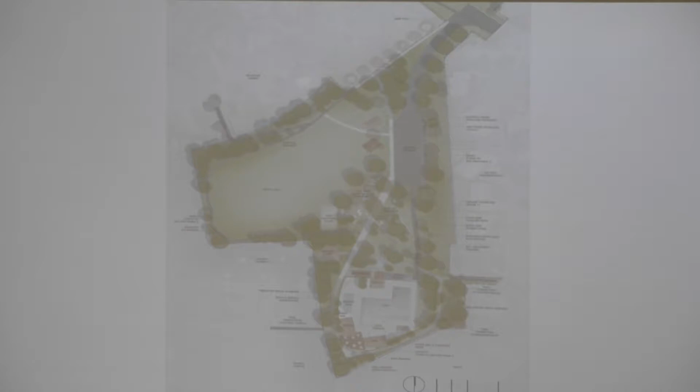Public Works is here so they can speak to how the boiler system and everything works. Key to its existing infrastructure is a solar thermal array on the back that preheats the pool water and helps eliminate heating requirements for the boiler. The idea of the project is to look into the future and develop a plan for how we can make the pool more energy efficient. There's a lot of information in the RFP, including prior work done by CORE, and a subcommittee we had with CORE and Holy Cross discussing variable energy pumps and installing those. That's what we want the RFP to look at.

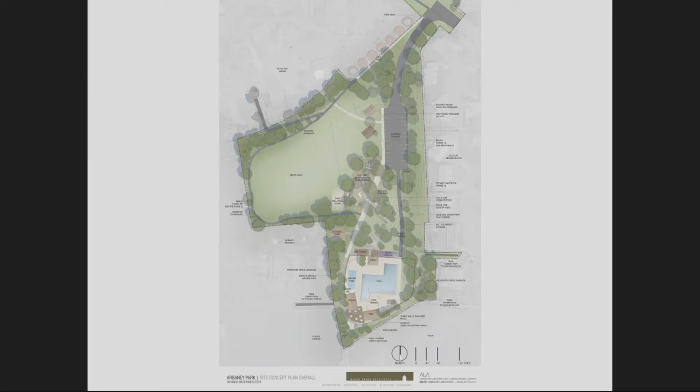The grand plan is that in phase one we do the phase one improvements, but conceptually plan for phase two improvements. This orange area shows what will be built in phase one. In phase two, the restrooms that are currently floating out here would get demolished and moved to the backside. So we conceptually want to include the restroom plans for Arbaney Park in phase one and figure out all of the plumbing needs.

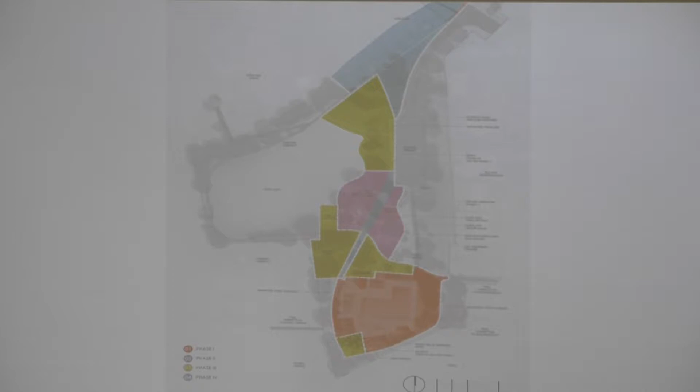There are subsequent phases of the park that I can go into in more detail when we talk about the capital improvement plan, but eventually, not included in this particular scope, we'll be redoing the playgrounds. We have ideas for another pavilion and additional volleyball courts, and that kind of thing will happen in subsequent phases. Anything else you think I should add from this piece, Chris?

So the tasks outlined in the RFP are to develop 2 conceptual options and cost estimates for the kiddie pool. We need full mechanical, electrical, plumbing for the outdated pool pumps and mechanical equipment, and then changing room improvements. There are modest improvements to the changing rooms that I summarized before.

Conceptual design for the future Arbaney Park restrooms. And just to clarify, the Arbaney Park restrooms are for the park, and access to those restrooms is from the park side. They're not in the gated, fenced area.

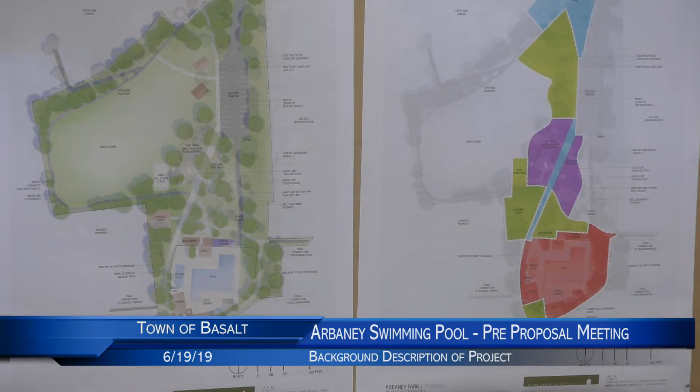One of the ideas from Post is they thought there was a lot of visual barriers when you drive into the parking lot. What you see now is kind of the back end of the solar thermal array where we have some tarps and store the pool covers that we're not using. So they want to really open up this particular area.

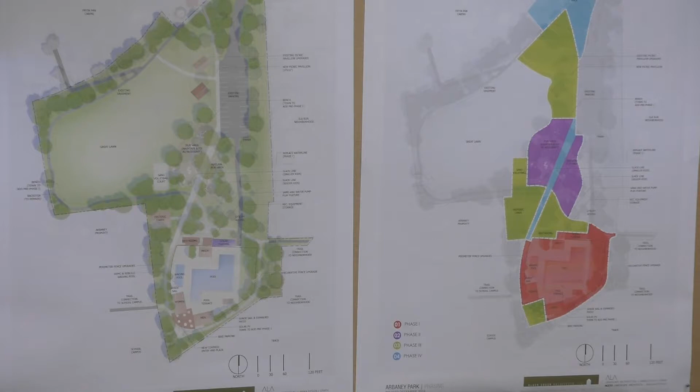We want to develop costs for the selection of design and budgeting. In other words, we want 2 conceptual designs for the kiddie pool. Our thought was that they might be totally different, and that we'd have cost estimates that might range in price. You'd take the design to a level sufficient for doing cost estimates, but you wouldn't actually do bid documents or construction documents on both of them.

And then once the selected design is chosen by the town, you would prepare the bid documents so that we can go out to bid.

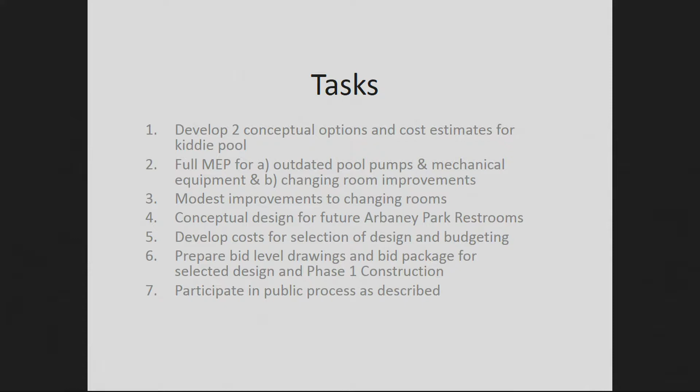And number 7 is participate in the public process as described. Here's the public process. It's not a really deep public process. Post feels that we've gotten a lot of direction when we prepared the original Post Parks, Open Space and Trails Master Plan. They've met with the town council and received direction from the town.

One of those items was really on whether to have a hot water pool or expand the seasons for the pool. The direction from the town council was that the basic framework and makeup of Arbaney Park pool will remain the same. It's to be a community park pool. It's going to be used for 3 months out of the year and will not become a full season pool, and it'll be run lifeguard-wise with the existing business model, which relies on high school and college age kids.

So for the public process, we're not really going out to the public and saying what we want. We have kind of a budget that we're working under. We're not intending to go out for a bond.

So it's pretty simple: a kickoff meeting with staff, a charrette with Post and town councilors, meet with staff, Post, committee, P&Z, and town council as requested. I have an asterisk there because we were envisioning those would be included in the RFP as a cost, so if we ask you to come to more meetings, there would be a cost for each meeting. One public open house where the two options are presented.

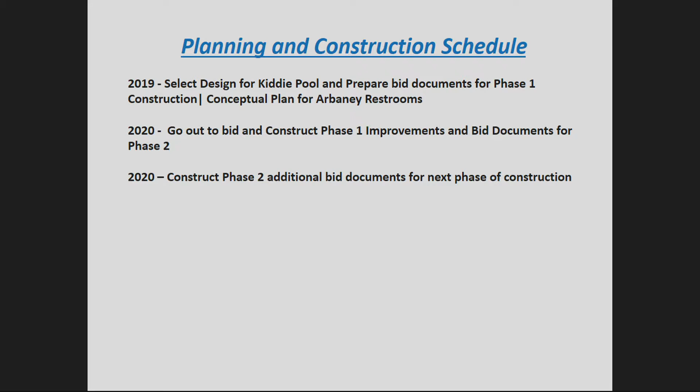Funding for Arbaney Park, I just want to outline for you the money that we're intending to spend on Arbaney Park. In 2019, we currently have $50,000 budgeted, and if you saw the capital improvement plan, it was included in your proposal. So there are places we can take additional funding if we need additional funds this year, and I'll speak a little bit more to that in a bit.

In 2020, we have $475,000, so we're hoping to build the phase 1 improvements for that amount. Keep in mind, we've never prepared cost estimates, so this is looking at our overall whole list of things that we want to accomplish in our parks, open space, and trails, and kind of allocating what seemed reasonable. In 2021, $350,000, and then we have significant funds again in 2022 and 2023 with $600,000 each.

In the proposal, there's a table that we want firms making the proposal to actually fill out. We've found that when we have an outline of what we want people to fill out, we can more easily compare prices across the line. So there's a location to put the price for the design and engineering and the price for each additional meeting, so we can compare apples to apples. Here's your price for the open house and a price for the charrette, et cetera.

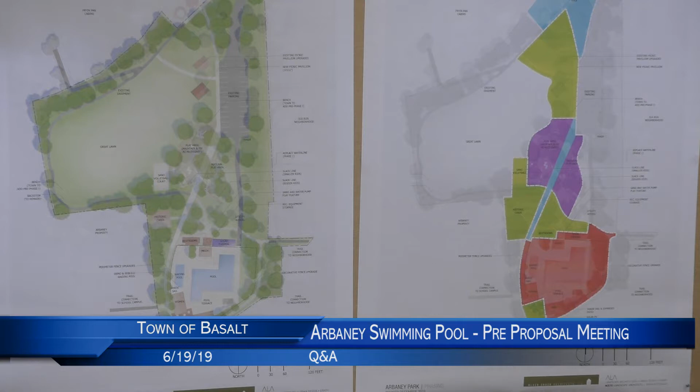I should have clarified, there's another piece to this project: there is a 2-inch line that serves the pool, and it comes through the Elk Run residential neighborhood, goes over to the restrooms, the current ones that we want to demolish, and then feeds the pool. And the pool actually is never drained. This year we filled the pool using the fire department and their hose. So as a separate project, we have a water line project, and that's being managed by SGM, and that's going to be handled under additional contract. But you can assume in this that you're going to have enough water, and the water that's going to come in is going to serve the pool, and it's also going to improve the irrigation system in the park. There are a bunch of options about where that location could be, but that's not included in the RFP.

So with that, I'll open it for questions, and if you don't mind coming up and asking at the mic, that would be great. No questions? Oh, got it.

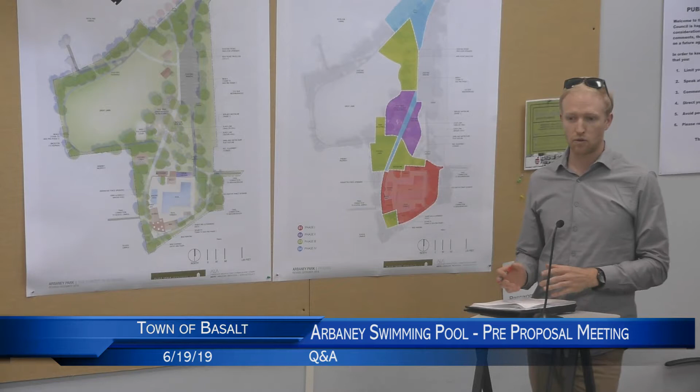That's for the whole system, thank you for asking. That's everything, including why we want you to conceptually plan for the restrooms, because we want all of the pumps and mechanical systems to be designed for the needs of the whole entire park, not just the kiddie pool. So it'd be replacing the recirculation pump for the pool itself, all the heating systems, the chemical systems, all that for both bodies of water.

Yes, but it may not be a total replacement. You may have a program where we outline how to phase all of that in. We're looking for an overall program for how to most effectively do everything. We might not automatically just replace all the equipment that's there.

The town wants an assessment of whether they should upgrade pumps to be more efficient, or not, on the entire MEP system for the pools. And are the pools on two separate systems right now? Are there two filters, one per body of water? Are there two recirculation pumps? Rob is indicating yes. Rob, why don't you join us.

The total mechanical system is approximately 24 years old, except the solar thermal, which was installed in 2013, I believe. There's another separate improvement programmed for this year, PV panels on the men's locker room, which is right here. We have that included as a separate item in our budget.

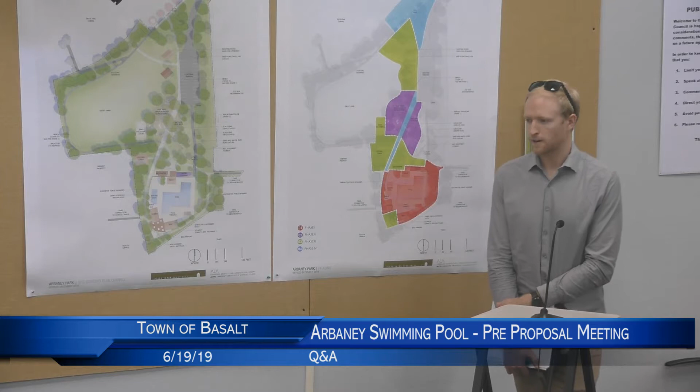The pool itself has the solar panel on the main pool, and there's a controller that when you meet certain set points, it switches from boiler to solar. The wading pool is a standalone, gas-fired boiler only.

As far as the wading pool, is there any thought to do a spray ground? Is that one of the options we could come up with, or are we just focused on the pool itself? You can have spray features. Originally, we had this as a spray park.

We have a fountain at Willits Park, and we're thinking about putting one at the Basalt River Park. So we were rethinking that we didn't want just a bunch of spray features, that we didn't want to be the town of spray features. The latest thinking is that we would redo the wading pool and potentially make it bigger. We could look at additional features, but it wouldn't just be a spray park like we have it at Willits.

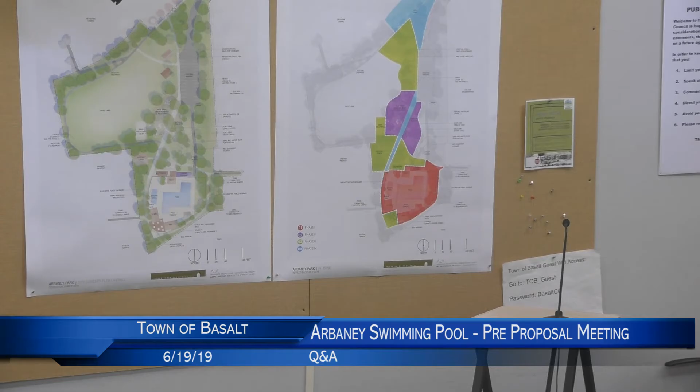Jeff Halferty, JH Design. Are we to assume that the existing mechanical room has enough square footage for any additional equipment, for either the solar array or any of the other proposed mechanical pumps for the pool system?

It's good — you can go over and look. There was a picture of the room in the RFP. I'm thinking that if you don't think it's large enough, you should draw it to our attention. It's a concrete block structure, so it's not something that's easily expanded, but there's enough room adjacent to it if we needed to do something. It's particularly the fact that we're expanding this area. Is that helpful? Yes, that's helpful, thank you.

And then on the wading pool, is there a number of occupants and/or a square footage size, or is that up to our design team? I think that's up to your design team to give us some recommendations on that.

And do we know the existing area of the existing pool now? You mean the square footage? Yeah, about. We've surveyed — SGM did a survey, we included that in your packet — but we can get you the area of the pool. The gallons of water are in the RFP. Okay, thank you.

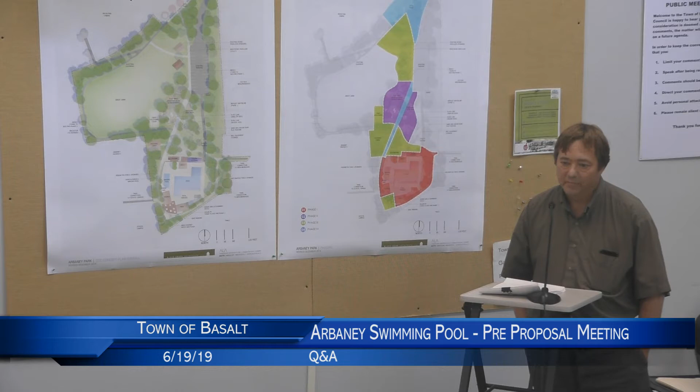Okay, so you discussed green goals. Are there some quantifiable specific goals for the pool? Because if we go full bore, it might mean putting in a new mechanical building, and that's going to blow your budget. So we can be efficient, but we don't have any targets — we have overall targets for the town of reducing greenhouse gas emissions, but not necessarily for the pool. Is it a target of efficiency or a target of cost savings?

I know that they're somewhat related, but I would say the main goal, the lens that the council would look at, is primarily reducing greenhouse gas emissions and cost. We've got one councilor who, if you could make the pool 100% electricity—which isn't very reasonable—I think they would, because it's an efficient source of energy.

But we do have to weigh that with cost and our yearly outgo. I think we're looking for expert advice, someone to do a deep dive. We've used our free resources or modest cost options—SGM did a study 15 years ago, and CORE did the one included in your RFP. But we're looking for a deep dive with some recommendations, and again, it may not be that you do everything at once, just laying out a schedule of what we should anticipate and look forward to.